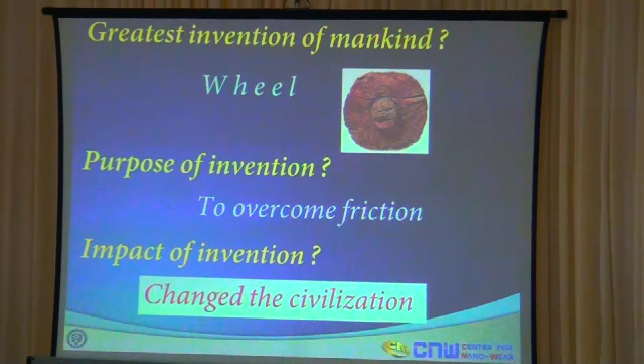Now, the ability to move one material from one place to the other changed many things, transportation, and had implications in various fields of technology. Also, if you look at this picture here that we often find in historical textbooks of tribology, you see this great statue being moved by a lot of people, a lot of slaves. But here is one friendly person who is allowing this task to be done very well.

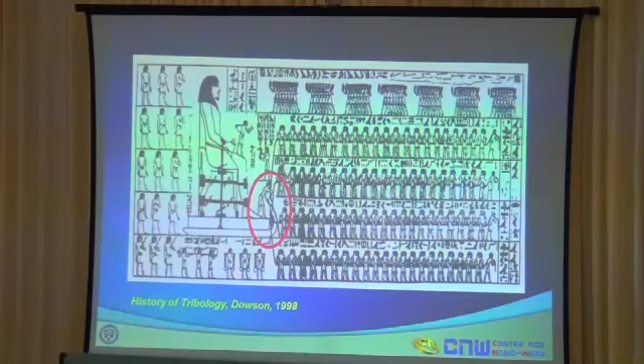And that is this first tribologist in the world. This person is basically lubricating the interface to make the sliding take place easier. This image was found in the walls of Egypt maybe 4,000 years ago.

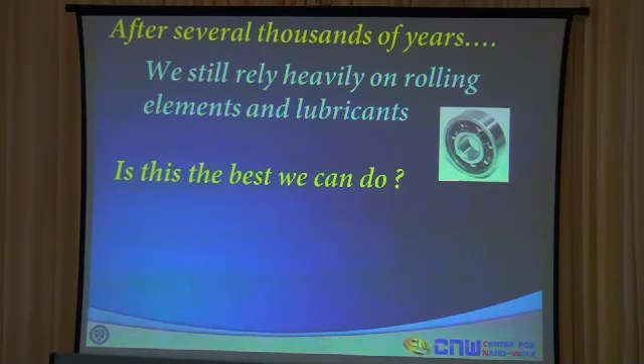After several thousand years, what do we have today? We still rely heavily on rolling elements and lubricants like bearings. Without these, machines will not survive. Also, is this the best we can do? Well, currently it seems like it's doing a good job, and it's the best we can do so far. We're getting more precise, we're getting smaller, but we have to be cleaner because we're talking about green tribology and we're concerned about environmental problems.

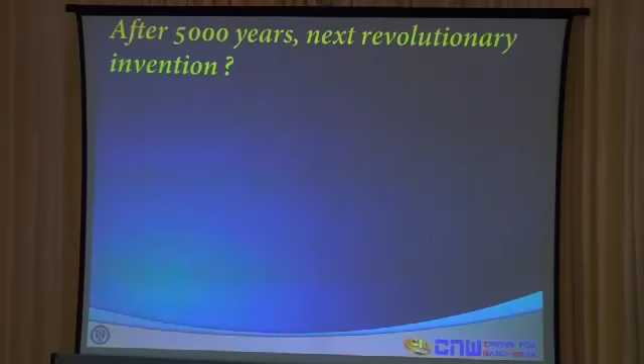Well, after 5,000 years, what do we think is the next revolutionary invention? This will depend on your individual thoughts, but maybe some of you will agree that perhaps molecular machines would be the next revolutionary thing. Being able to make things very, very small at scale so that we can probe into the bodies of our body without opening our skin with minimal invasive surgery, and also probing into microscopic things to do some sensing, diagnostics, and prognosis.

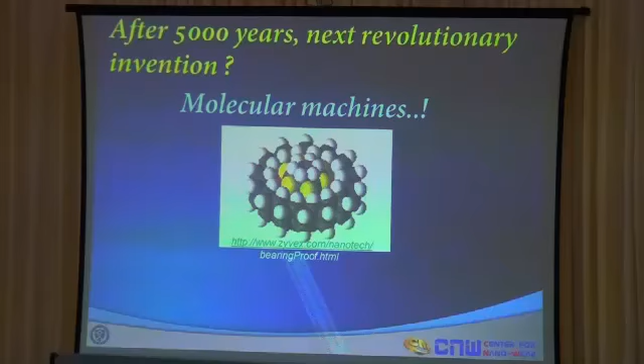This is an artist's view of what a molecular machine looks like, and actually chemists are trying to make this kind of machine right now around the world. Now, the crucial role of tribology is in making this kind of motors being able to run with sufficient reliability and low friction. Without tribology, this ultimate precision engineering will not be realized.

Fabricating the molecular machine is one thing. Perhaps many of you have seen MEMS motors developed at places like Sandia National Lab, with very cute micro MEMS components able to spin at very high RPM. But right now we do not have a single commercialized MEMS product that depends on gross sliding motion.

A lot of MEMS products are based on elastic movements, like accelerometers. Now what is the reason why, despite the fact that this kind of fancy MEMS component was developed many years ago, we do not have a commercial product? The reason is because we cannot overcome the surface forces, which become so dominating, especially at micro scales.

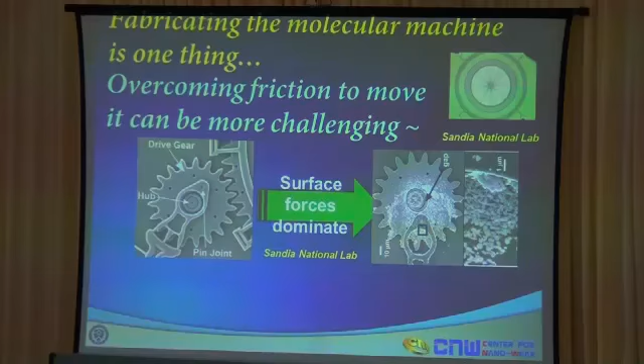This is an example of a micro gear composed of many mechanical elements at micro scale. We start running this component and because of surface forces, it fails and it's not reliable. These systems cannot work with conventional lubricants because the lubricants will dominate the forces due to surface tension. So these must operate dry or with very nanoscale lubricants.

Preventing wear would be a greater challenge in this kind of system. So with that brief introduction, what are the challenges that lie ahead? Despite the fact that tribology has been researched over decades, perhaps hundreds of years, can we control friction? The answer is no. Can we achieve zero wear? The answer is no.

What are the mechanisms? We're still trying very hard to understand why friction occurs, why wear occurs, to be able to prevent this in the ultimate end.

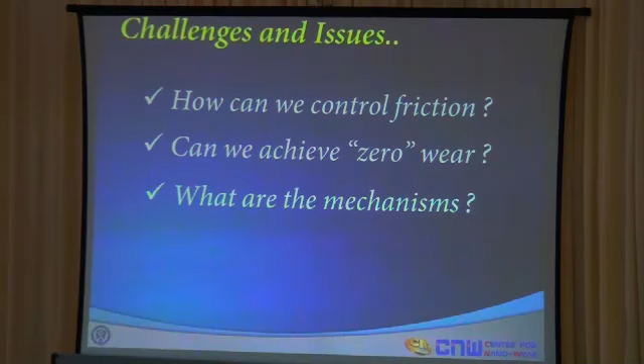What about macro versus micro phenomena? Tribology occurs over a very wide scale. Even earthquakes are related to tribology. Oil drilling, excavation - these are all macro scale tribology. Machining too. But now you can come into micro scale tribology, where you have micro components rubbing against each other. The conditions are completely different, and friction and wear is a very system-dependent phenomenon, as you all know.

So great challenges lie ahead. With that overall background, these are the contents of my talk. I know I'm giving about one hour for my talk, and I would like to talk about several topics that we've been doing over many years in our lab, so I will not bore you with one subject going deeply into it. First, I'll talk briefly about macroscale friction, especially the effect of particles on friction and wear, and what we can do to eliminate this kind of problem.

And then I'll move on to microscale tribological characteristics. Microtribology actually started because of a very important technology called hard disk drive. Hard disk drive was the ultimate driving force behind the development of microtribology as well as nanotribology. It's a very well established technology, and I would like to review some of the technology that went into the development of hard disk drive.

Then I'd like to talk about atomic force microscopy, which is the most important tool used in nanotribology, and the wear associated with such devices, and talk about silicon bushings, which are used in MEMS to reduce the contact area to reduce stiction, and discuss the wear of these components. Basically, the AFM probe tip and the silicon bushing represent high versus low contact pressure for silicon-based materials. I'll tell you that despite the fact the materials are similar, you have very different wear behavior because of the level of contact pressure.

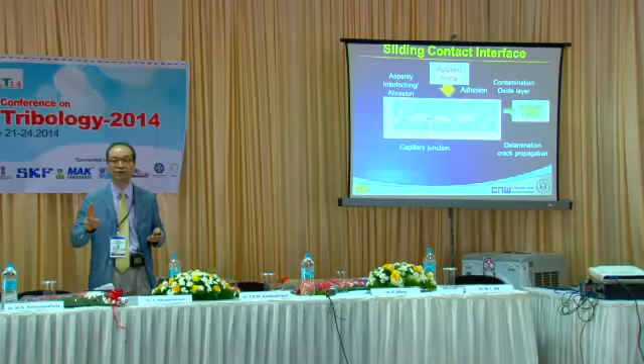So all these very complicated phenomena are going on at the interface, and we have to be able to control this. In describing this very complicated phenomena, we use two coefficients, as you all know. First one is the friction coefficient, and the second one is the wear coefficient. Perhaps this may not be so familiar to you.

Wear coefficient is defined by the wear volume times the hardness divided by load and sliding distance, represented by Archard's wear equation. In tribology, what we're trying to do is first be able to predict what the friction coefficient is, which is in the range about 0.001 for a very well lubricated system, and can be as high as 1 or above for dry systems. For wear coefficients, it can be about 10 to the minus 2 to 10 to the minus 8, depending on the system. Very wide range.

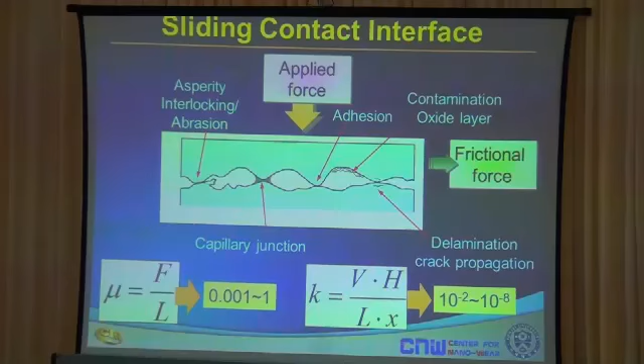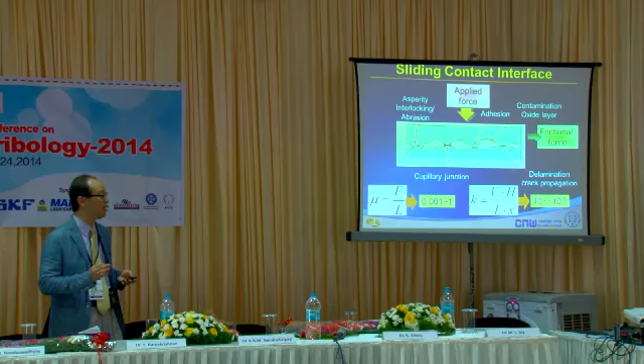So what is the purpose of tribology? Trying to be able to predict these coefficients and ultimately being able to control these coefficients. Are we able to do that? And the answer is no. We're trying very hard, but we're not able to control these values accurately enough for various technologies.

Now, given this kind of complicated situation, what do we know about macro-scale tribology? Firstly, as you all know, friction coefficient is not a material property. It is a system-dependent property, and it changes with history, and it changes with system.

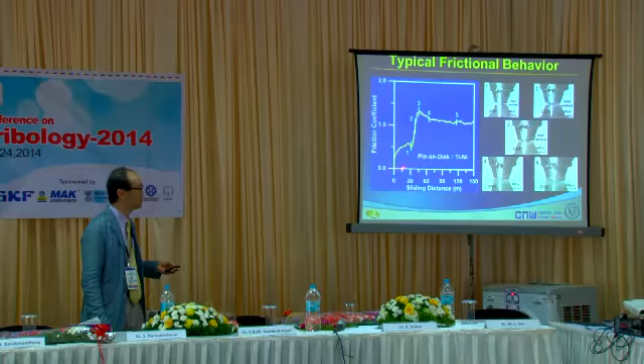This is data that gives you a very good example of such a characteristic of friction. What you're looking at is the friction coefficient versus sliding distance. If you have two metals sliding against each other, in this case titanium on nickel, you can see that the friction coefficient starts slow and then suddenly rises and reaches a steady state.

The point of interest is, why does this friction coefficient increase? Well, if we observe the sliding interface with a microscope, with a pin, and this is a flat surface here, the thing that you see here is a reflection, so you may ignore this cone-shaped thing at the bottom. It's just a reflection of the top surface. Bottom surface is flat. At the point at which the friction coefficient starts to increase, we see the creation of a significant wear particle.

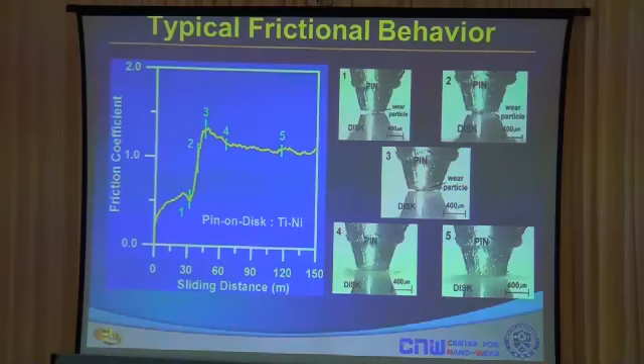This particle serves to damage the surface by way of abrasion and micro-cutting. Obviously, the friction goes up. And once enough number of particles are created at the interface, you sort of reach a steady state as particles are ejected from the interface and also created at the interface.

Now, how can we do this automatically? The way to do that is by texturing the surface so that the textures are able to trap the wear particles. And these are undulated surfaces that we've been researching over a long time now. This is an example of such a surface.

What you're looking at here is a silicon surface with grooves artificially fabricated on the surface to trap the wear debris that is being created. On the top surface, you see a regular flat surface after the wear test. In the case of the bottom surface where you have micro grooves, it is able to lower the friction by trapping the wear particles in these grooves.

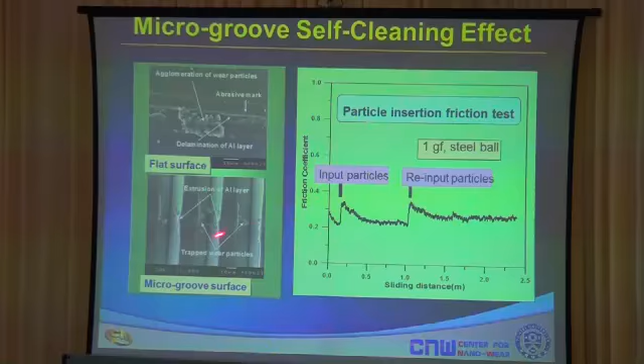This is the friction coefficient versus sliding distance. And at this point, we input the particles artificially, and the friction shoots up. But because of the grooves, it is able to self-clean the interface and lower the friction. Now we input the particles again, and the friction coefficient shoots up again. And then it is able to, again, eliminate the particles and reduce the friction automatically.

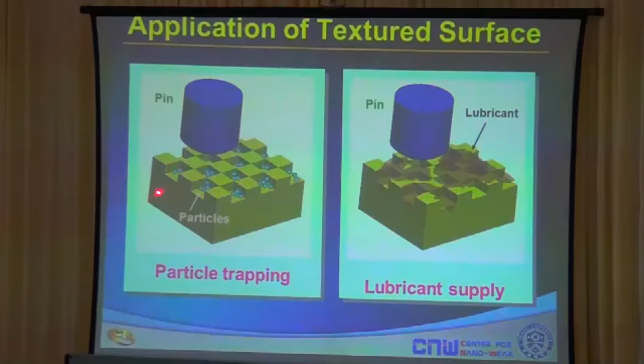So we have to use this kind of textured surface as much as we can in many mechanical systems to be able to reduce the effect of plowing action by the wear debris being created at the interface. So this is a conceptual idea about what texturing is. We would artificially fabricate these grooves on the surface that can act to trap the wear particles. And also in the case of lubricated systems, these traps are able to contain lubricant as reservoirs and being able to supply them to the interface more readily.

Now this kind of concept actually was proposed for cylinders and engines. And if you know about the lubrication state of engines, the piston ring travels between the top dead center and the bottom dead center.

In the middle section, the piston travels very quickly, and the interface between the piston ring and the cylinder liner is separated by a very thin lubricant film. In this case, the lubrication condition is hydrodynamic, and we don't expect much problem in terms of friction and wear. However, at the top dead center and bottom dead center, the ring stops momentarily, and you have pressure of the piston ring against the cylinder wall. This is when you go into mixed and boundary lubrication, and this is when you expect more problems.

So what we've suggested to avoid the problems at these extreme conditions is to texture the surface at the top and the bottom, to make the friction lower and increase fuel efficiency even by a fraction of a percent. I took this idea to car companies, and the first thing they said was, 'Professor, that's a very good idea, but it's not possible because it costs too much.'

This idea was proposed actually 20 years ago. Surprisingly, today a company called Doosan Industries in Korea is making engines like this for heavy-duty tractors. They're using laser techniques to groove the top dead center and bottom dead center to increase the efficiency of their tractors. It's not so feasible for passenger engines right now because it costs too much, but for specialized engines like ship engines, tractor engines, helicopter engines, this is a very feasible method to reduce some of the problems we face in these engines.

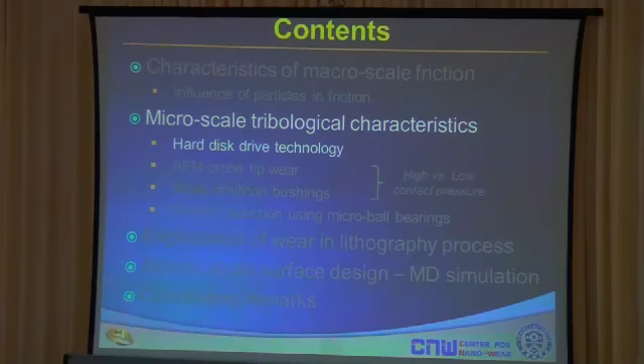As I told you earlier, the hard disk drive, which goes into every computer, has a tremendous amount of tribology inside the machine. Without microtribology developments, hard disk drives would fail immediately. What I'll be talking about is not the current hard disk drive, which is much more advanced, but the technology we've been using for this talk is quite old, yet so precise, and in terms of scale it's in the nanoscale. I'd like to introduce it to you.

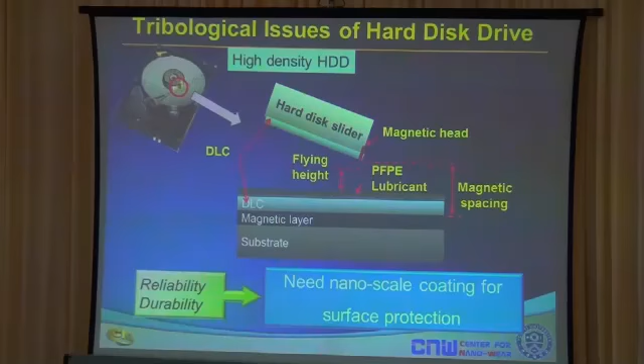If you look at the hard disk drive, it's composed of a slider head flying over a magnetic disk. The magnetic disk is composed of several layers, and the slider flies over the disk at a very low height, only about 10 nanometers. There's an incentive to lower this height so the head can be closer to the magnetic element, increasing recording density. So the industry is trying to lower this height further and further. Right now, in today's hard disk drive, the flying height is only 2 to 3 nanometers. It's mind-boggling to imagine the slider flying at that height.

Obviously, the problem faced is that sometimes you may have contact between the slider and the disk, causing friction and wear problems. This is what we want to avoid.

If we look at the way the disk is structured, it's also composed of complicated textures, including what we call a landing zone. The landing zone is a textured region with small protrusions on the surface, made by laser texturing. The purpose of these textures is to reduce the stiction between the slider and the disk when the slider lands on the disk as you turn off the computer. Without these grooves, the slider, because of its smoothness, would stick right on the disk and you wouldn't be able to start the disk. So laser texturing is used to make such grooves and patterns.

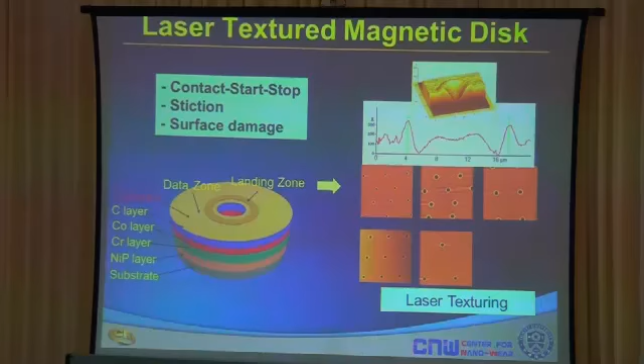When you turn off the computer, the slider will go to the landing zone, park there, and settle down on this track. Of course, the wear of these tracks is very important because it is sliding against the slider as the speed lowers.

And lubricant is used, PFPE—perfluoropolyether—a lubricant developed for this purpose. It's a fantastic lubricant with a thickness of only about 1.5 to 2 nanometers. So it's not like a liquid lubricant used in ordinary machines; it's a very semi-solid-like lubricant coated on the substrate by a dipping process, where you have a solution, dip the disc, and it's automatically coated on the surface.

But it's a little bit more complicated than that, because some of the molecules are attached to the substrate by way of chemisorption, in other words, by chemical reaction, so the bonding is very good. However, for most of the part of the lubricant, it is attached to the surface by physical adsorption, by van der Waals forces, and these are very loose molecules that have mobility and can move around.

It turns out that the percentage of these mobile molecules is important, because if the lubricant is removed from the track due to some contact, it needs to be replenished. In other words, the lubricant should be able to flow back and fill in that location. So the percentage of this physically bonded lubricant is important, but if you have too much of it, it will again pose some problem.

Now, how do you control the percentage of this physically bonded lubricant? You do that by the process of annealing. By controlling the temperature and the time of annealing, you can change and adjust the percentage of the bonded part to the unbonded part.

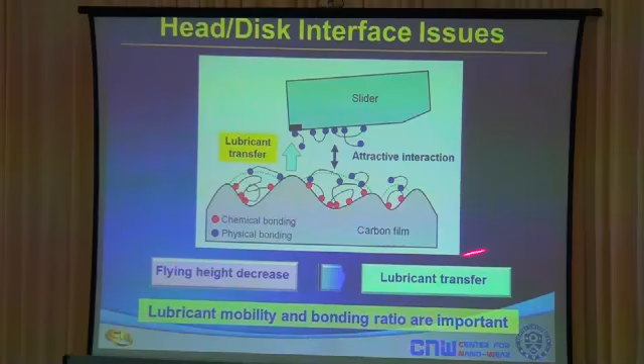So let me give you a schematic of what's going on. Here's a slider, and the head is at the tip of the slider, and you have lubricant on the surface. During interaction you have some lubricant transfer, and this can contaminate the head and make problems in terms of signal transfer between the head and the disc. As the flying height decreases, the lubricant transfer occurs to a greater level, and as I told you before, lubricant mobility and bonding ratio is important.

So what we do in this experiment is we want to see the effect of annealing, to see how annealing affects the flyability of the slider above the disc.

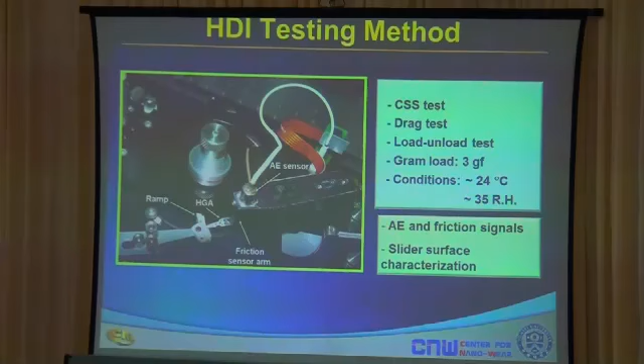This is a simple test equipment, a commercialized equipment that has a slider and a disc. This is the slider you see here, and you cannot see the head, but the head is a very small thing at the end of the slider. We conduct this experiment in what we call a contact start-stop test.

We start it, stop it, start it, stop it. We repeat this for 20,000 times. We can also do this test under a drag test, in which we make contact between the two specimens and run a sliding test at low RPM so the slider will not fly above the disc.

These are the conditions at which we perform the experiments. We have an acoustic emission sensor to monitor any abnormal signal between the head and the slider, the slider and the disc. And also we have friction sensors to monitor the frictional force.

It's semi-solid, but it works tremendously well in hard disk drives, and this is what makes today's hard disk drives work. Now, this is the effect of PFPE on flyability without annealing. This is the acoustic emission signal, and this is the friction signal. You can see that there's quite a bit of noise in the signal.

After you do this test, we disassemble these parts and look at the slider face, and you can see that the slider face is contaminated with lubricant. These are all patterns on the slider that allow it to fly at a certain height. But you see streaks of lines which are contaminations from the lubricant on the disc.

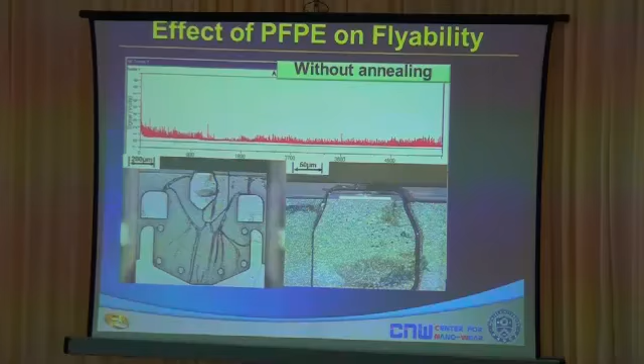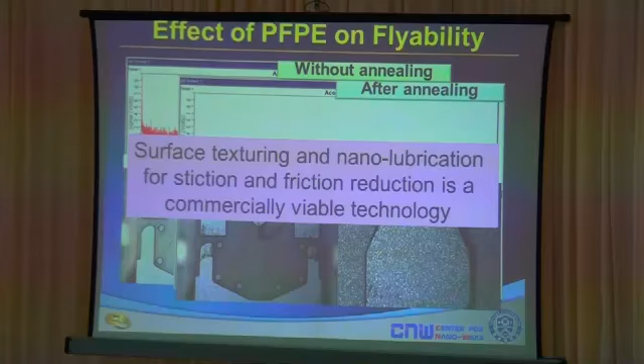Therefore, in the case of a very well commercialized product like hard disk drives, surface texturing and nano lubrication for stiction and friction reduction is a very commercially viable technology. Now, what we hope is to extend this kind of technology to other microsystems, such as MEMS that I showed you earlier. But without the drive from the industry, this kind of technology will never be utilized at the industrial level and will only be limited to lab scale.

Now I'd like to move on to another very important topic of nano and microtribology, and that's the issue of atomic force probe wear.

Atomic force microscopy is based on a very sharp tip that scans over a surface, and the deflection of this cantilever is measured using a very sensitive laser interferometry. By noting the amount of deflection, we can map the surface. If you scan this in X direction and Y direction, you're able to map the surface topography in 3 dimensions. And we can buy this equipment commercially, as you all know.

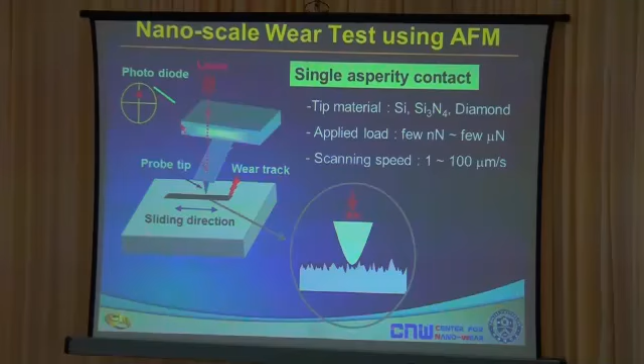But the issue is, because it uses a very sharp tip, there is an issue of wear of the tip as it slides over the surface of your sample. The tip material that we commercially use is silicon nitride. Sometimes we use diamond, which is much harder. The applied load is in the range of a few nanonewtons to a few micronewtons. The sliding speed is on the order of tens of micrometers per second.

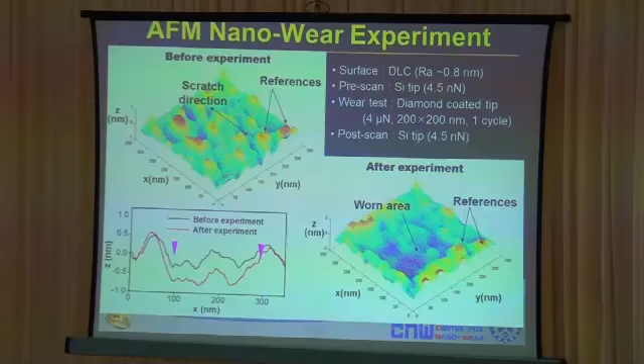Many times, users don't realize they just use the same tip to measure the surface because of convenience. These tips are expensive, so you don't want to replace them every time. But you have to be aware of the fact that tips do wear out and it will affect your measurement significantly.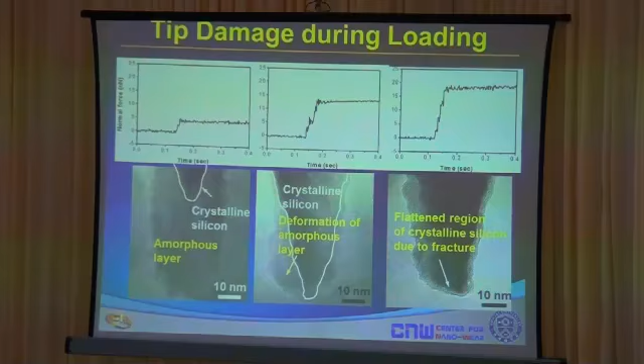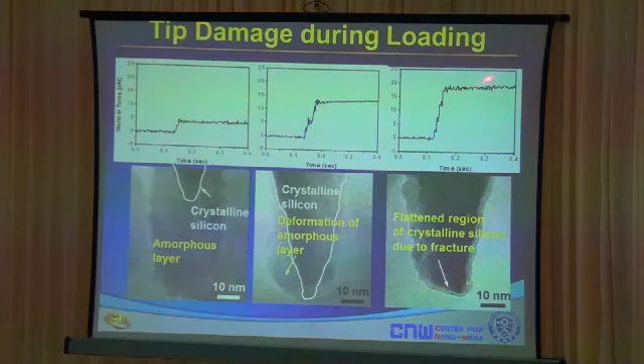Another thing we should be aware of is tip damage during approach. If you have an AFM tip approaching your specimen, but you do it at the wrong rate, you will damage your tip in that approach process. What you're looking at here is normal force in nanonewtons, up to 5 nanonewtons, plotted against time of loading. In this very short time of low force loading, your tip shape remains intact - in other words, you do not damage it. However, if you increase the rate at which you approach the surface for a very high load of 15 nanonewtons, you can see that you've severely damaged your tip just by approaching the surface. So this is another thing we have to be aware of when using the AFM.

Now, we looked at the wear of the silicon tip and what the mechanism of silicon tip wear was, and our point was to try to be able to quantify the amount of tip wear in this AFM operation.

What we did here was perform 320 micrometers of sliding on a silicon surface, and what we find is that the region where there was contact was flattened due to wear. By noting the shape of the tip before and after the wear test, we're able to quantify the wear amount, and furthermore, suggest the mechanism of wear.

This is the mechanism we suggest: the silicon tip becomes oxidized, and this oxidized layer, because of abrasive adhesive action against the specimen surface, will eventually wear out.

This is another test we did, where we looked at the progression of tip wear with respect to load. The load we used was between 10 nanonewtons up to 50 nanonewtons. Here we're looking at the wear volume and the wear coefficient against the sliding distance.

What you can see here is that the wear coefficient initially is very high, but it decreases as the wear increases. The reason is because the contact pressure decreases as the tip gets blunted.

The important outcome of this research was quantifying the amount of wear. The wear coefficient I introduced earlier for the AFM tip is in the range of 10 to the minus 2 to 10 to the minus 3, which is in the category of severe wear. So even despite the loads we use being in the nanonewton range, for AFM used in nanotribology research, the wear coefficient we get is about 10 to the minus 3.

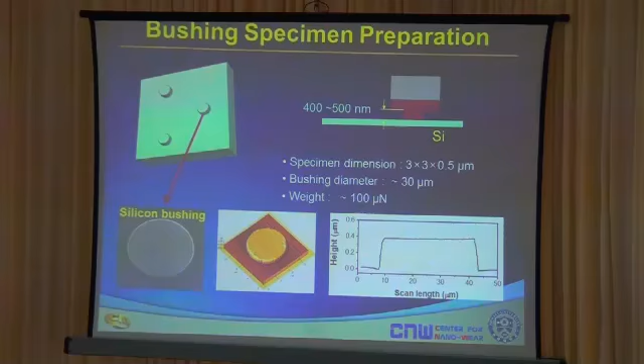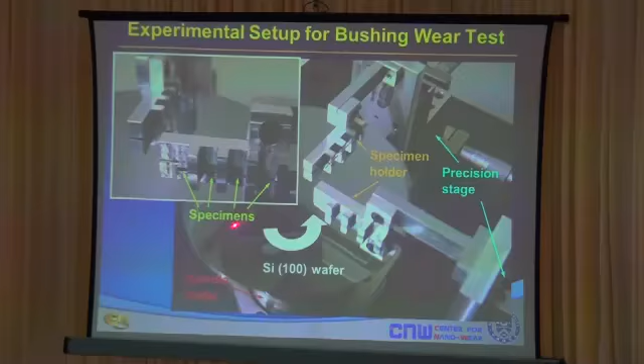We create these 3 bushings on the silicon specimen and reverse the specimen on top of a counter surface, which is also silicon. So this is the counter surface - it's silicon, and the specimens are placed in these pockets here. There are 3, and these specimens are allowed to slide against this silicon wafer as the wafer rotates slowly.

We try to rotate it at a certain speed so that the top specimen will not bounce around, because if you use 2 flat surfaces in a wear test, the biggest problem is alignment. So to overcome this, we don't apply external forces on the specimen - it's the natural weight applied to the counter surface. We run the bottom specimen very slowly so that we can maintain relative flat-on-flat contact.

The good thing about this kind of experiment is it's very simple, and we can run experiments for a very long time. Unlike the few millimeters you use for sliding in AFMs, we run these experiments for kilometers.

By measuring the amount of wear volume, we're able to quantify the wear coefficient, and the wear coefficient is in the range of 10 to the minus 7, which is about 4 or 5 orders of magnitude smaller than that of the AFM tip. Now, if you look at the wear of the silicon oxide bushing, we fabricated silicon oxide bushings and observed the wear.

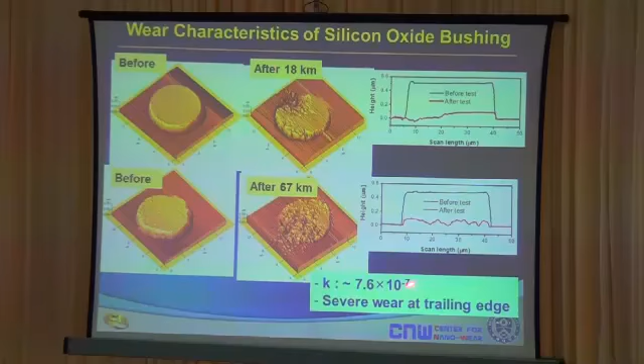After 67 kilometers, the initially very well-plateaued bushing became worn like that. From here, we can quantify wear, and the wear coefficient was about 7 times higher, also in the 10 to the minus 7 range, but the coefficient is about 7.6. So silicon oxide, which is softer than silicon, showed much greater wear.

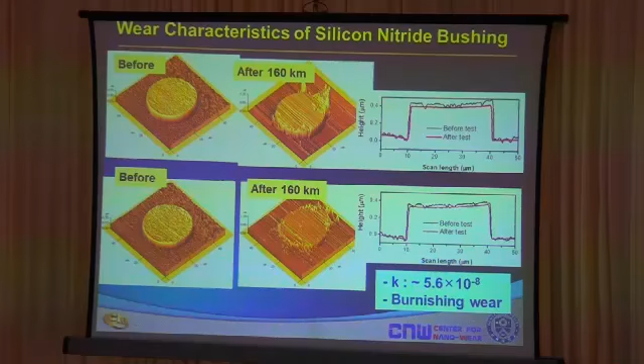What if we move on to a much harder silicon nitride bushing? You can see that it wore out very little, and the wear coefficient in this case was in the range of 10 to the minus 8, much lower than that of the silicon bushing itself.

So what is all this showing us? It's showing us that even for the same kind of material, silicon, depending on the contact pressures, you can have tremendous difference in the wear coefficient.

In the case of the silicon AFM tip, with a radius of 20 nanometers, despite the normal load being only tens of nanonewtons, the contact pressure is in the gigapascal range, or hundreds of megapascal. In the case of bushings, despite the load being as high as 33 micronewtons, the pressure was only in the few hundred kilopascal range, and the wear coefficient is much, much smaller.

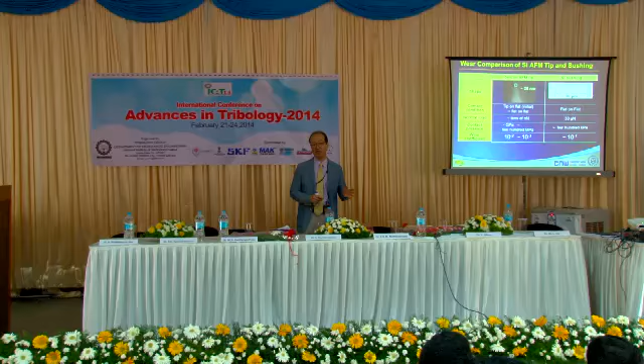So basically, this study is showing you that tribology is very system dependent. It's not a material property. Depending on the contact condition and also on the contact pressure, you can have tremendous difference in the tribological characteristics. There's 4 to 5 orders of magnitude difference, and AFM wear certainly is not at the nano level—it's tremendous if you quantify it.

Now, to go into somewhere between the atomic force microscopy and bushing experiments, what we did was create one of the smallest pin-on-disc type of experiments. Here what you're looking at is a gold wire wear test.

Diameter of the gold wire was about 60 micrometers. I don't know if you can see this, but that's the gold wire. It is contacted against a silicon wafer at an angle, and this gold wire was very carefully prepared so that it's relatively straight and the edge is flat. So the wire is in the form of a cylinder, and basically we're contacting the edge against the silicon wafer, and we rotate the silicon wafer to create wear on the tip of the gold wire.

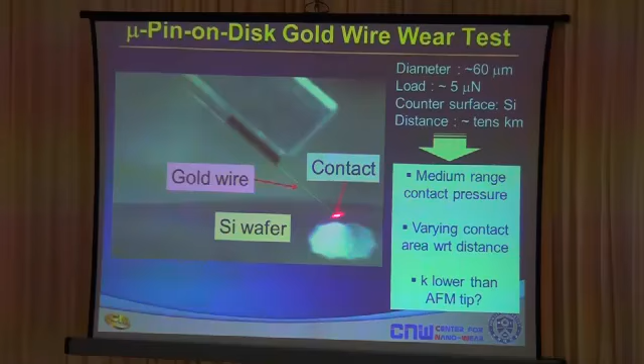This is the amount of wear you get after 29, 58, and 80 kilometers of sliding. The amount of wear we can quantify by noting the volume that's been taken out from this tip of the gold wire.

When we quantify this, what we find is that the wear coefficient varies with sliding distance. It does not increase continuously—it increases and then starts to go down. Now, from this, what we do is measure the incremental wear coefficient, the wear coefficient between sliding distances.

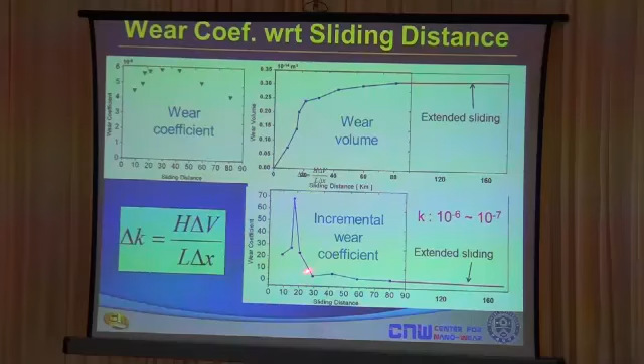The incremental wear coefficient is defined by this particular equation. So between sliding distances, if we measure the incremental wear coefficient, it goes up and then goes down to a very low level. With extended sliding, basically what we're saying is that we can eliminate wear to a great extent. As the material runs in against each other and optimizes the sliding interface, you can see that the wear decreases tremendously.

We can use this concept to design the surface to start with. In other words, with optimized sliding and optimized surface finishing, we can control the local contact pressures to achieve extremely low wear. And if we can do this with machines we're using for automobile component parts and all that, I think we can reduce the initial phase at which we initially have high wear.

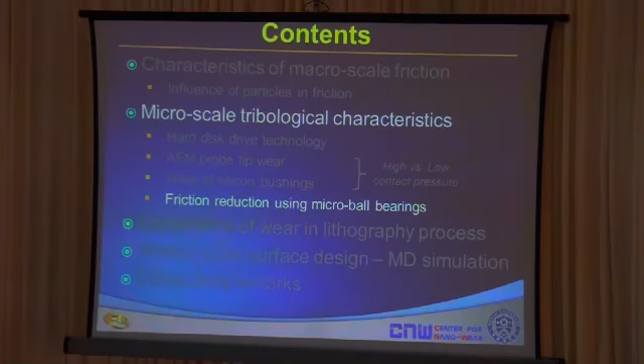Now I'd like to look into the way of reducing friction using micro ball bearings. As we all know, we use bearings extensively in all machines. So in the case of micro components, why not try to use micro ball bearings as well?

So what we did was try to apply sub-100 micrometer size micro ball bearings. We place it between two flat surfaces, and we drive the top surface and observe the rolling friction with this micro ball bearing between the two flat surfaces.

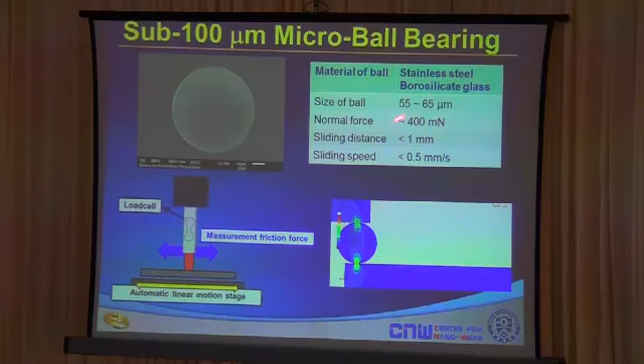This would be the schematic of the equipment. This is the top surface, this is the bottom surface, and these are micro ball bearings placed between the two flat surfaces. We drive the bottom stage to measure the friction force, and we monitor that by the load sensor attached over here. The size of the ball we use is in diameters on the order of about 50 micrometers, and that's the normal load that we use for the experiment.

With ball bearings at the interface, they're effective in reducing the coefficient down to about 0.007 range. In other words, these micro ball bearings do work.

So the number of balls is not a critical factor as long as you have 3 or more, because you would need 3 contacting points to support 2 plates.

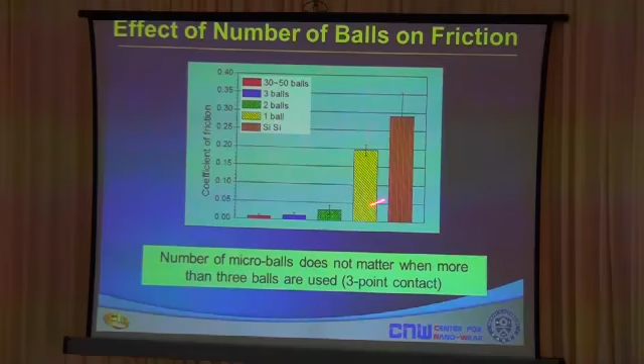We find that by using a few microballs, you're able to lower the friction. But the problem is if you have few balls, the amount of force being applied to these balls would be high, and therefore you would have a high failure rate.

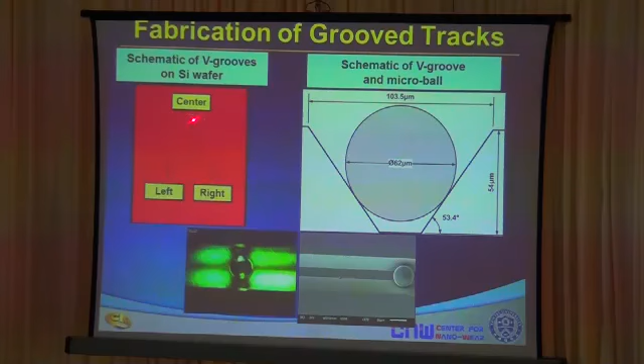So what we did in the next experiment was to create grooves that look like this. We created 3 grooves, 3 tracks on our silicon surface, and the groove dimension was about 50 micrometers, and about 100 micrometers. We place our ball inside the grooves, as you see in this SEM image and also in this optical image. So we have 3 balls inside these grooves, and we put the top surface like this, and we perform our sliding.

The problem with these micro ball bearings is, unlike macro scale ball bearings, we're unable to heat treat them. So they're in a very soft form, and because of the softness, they undergo severe plastic deformation, and because of that the friction coefficient is relatively high.

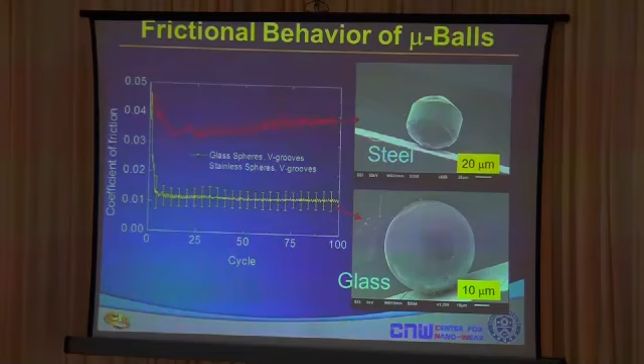In the case of the glass ball, the hardness is higher than the steel ball that we used, and in this case we're able to maintain a low friction coefficient for about 100 cycles.

Of course, we're interested in a much higher number of cycles, and this is a test that we did for about 2,000 cycles without lubricant and with lubricant.

The lubricant I call here is a nano-lubricant because it's not a liquid type of lubricant. It's the kind of lubricant that we use for hard disk drives. It's a single monolayer of organic film, so it's like a semi-solid type of lubricant. Its purpose is to reduce the stiction between the two surfaces.

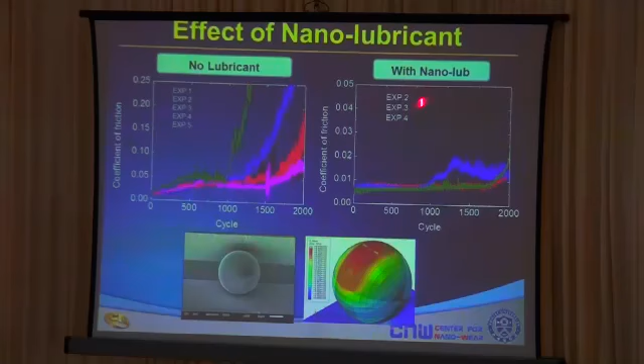Without the lubricant, you can see that the balls fail at about 1,000 cycles. But with the nano-lubricant, you can see that for 3 repeated experiments, we can maintain the friction coefficient relatively low up to a much larger number of cycles.

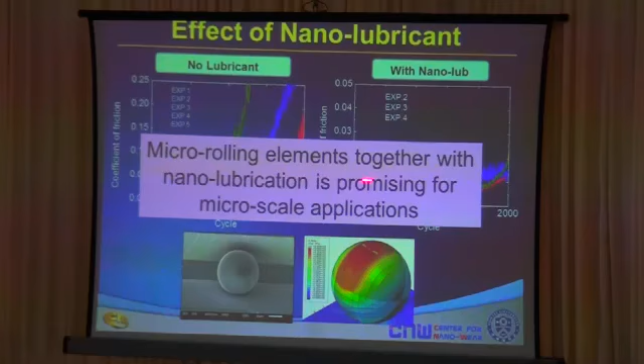Obviously we need further optimization to make this particular technology commercially viable, but nevertheless we've shown the feasibility of using microballs for very small mechanical systems. So, micro-rolling elements together with nano-lubrication is promising for micro-scale applications, would be my message to you.

Now I'll go into the next topic of exploiting wear for the lithography process. The reason why I got into lithography from tribology is because, after all, if you look at wear, it's the process of removing materials, and that's exactly what we want to do in manufacturing when we do cutting, grinding, or polishing. But wear occurs at such a small scale that if we can control it, we can control the manufacturing process and turn it into a very precise, ultra-precision manufacturing process.

So the concept was to apply this kind of wear process for lithography, and many people have done that; it's sometimes called direct scanning probe lithography. Basically, you take a very sharp AFM tip and scribe against the surface to create very fine patterns.

The problem with this process is, because of the wear I showed you earlier, when you create these small patterns on the surface, you experience a very large amount of tool wear because of high pressure, and also you have creation of burrs at the surface, just like you would in typical mechanical machining or grinding. Also, the depth of cut you can achieve is very shallow because of the limited force you can apply to the tip, otherwise the tip will break.

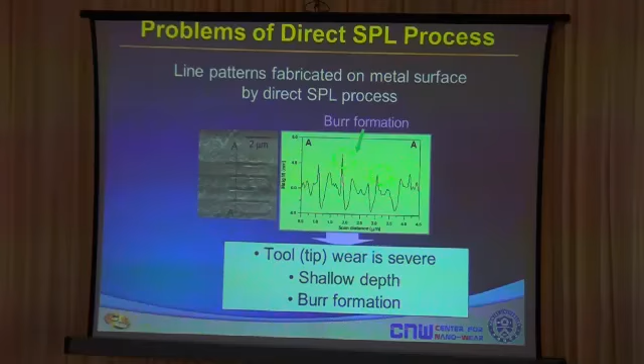So what we try to do is improve upon this direct lithography technique and be able to make these grooves without facing these problems. This was the idea: it's called Mechanochemical Scanning Probe Lithography, MCSPL.

The concept is as follows. We use the same AFM, but we don't use it to machine the substrate directly because the tool will wear out. On the substrate, we coat a very soft material, in this case a self-assembled monolayer, an organic film. We use an AFM tip programmed to remove the self-assembled monolayer at locations where we want the pattern to occur.

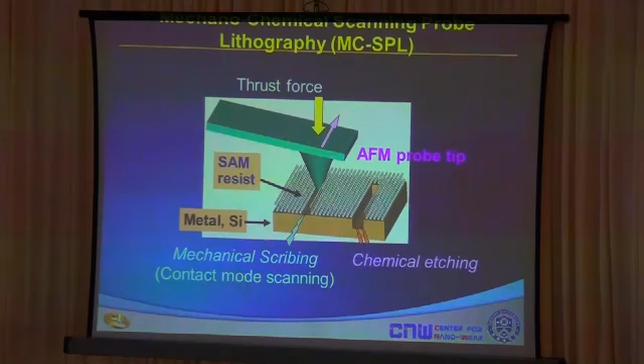So after mechanically removing the soft self-assembled monolayer with an AFM tip, we follow it with a second process of chemical etching. The self-assembled monolayer serves as the protecting resist in the etching process, so the exposed region will be etched and the covered region will not be etched. After the chemical etching, we're able to create these very fine grooves.

The self-assembled monolayer is a very interesting material, heavily investigated by chemists. It's a functionalized molecule with a long chain of carbon, and at one end it forms a chemical bonding with the substrate, and the substrate bonding against the lubricant layer is very stable. At the end you can have a terminal group, and you can functionalize this molecule to make it hydrophobic or hydrophilic, however you want. You can also adjust the length of this chain using different kinds of chemicals.

When you coat this kind of chemical on your silicon wafer, simply by dip coating, you're able to align these molecules very well on the silicon surface. It's called a self-assembled monolayer because it automatically aligns to a very stable, minimum energy state, represented by the schematic here.

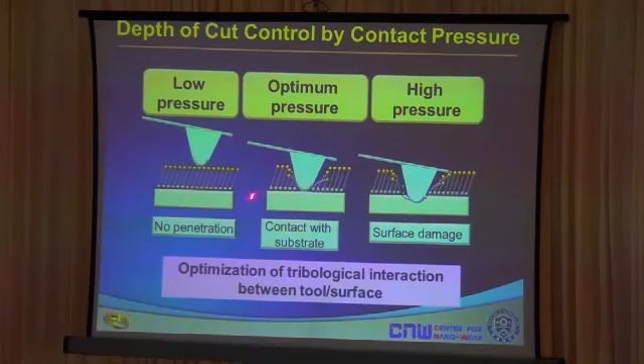Using this particular resist, what we want to do is remove just the 2 nanometers of resist from the silicon surface. If we have too low contact pressure, you will not be able to penetrate the organic film. If you have too high contact pressure, you go beyond the organic film and start destroying the substrate, which is not what you want to do. Basically, you want to optimize the contact pressure so that you're able to just remove the self-assembled monolayer, as shown in this figure.

Obviously this needs a lot of optimization, modeling, and trial and error. In the end, we're able to remove just this self-assembled monolayer top layer, and these are the patterns we're able to achieve with this technology: a silicon surface with 1 micrometer spacing, width about 250 nanometers, depth about 100 nanometers.

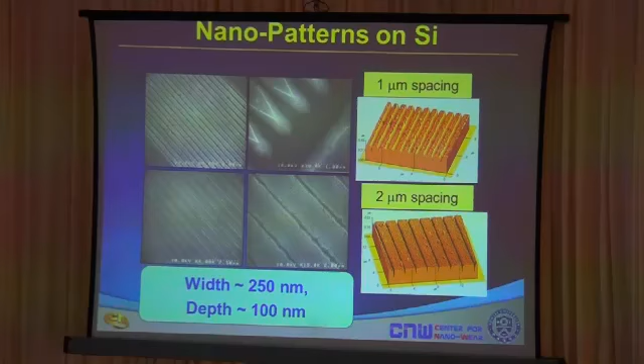Obviously you can make this kind of pattern using photolithography, but photolithography requires several steps and you have to make a mask, and once you make a mask you cannot change the pattern. But if you use this process, you can simply program your AFM tip to whatever pattern you like, so you're very flexible in terms of the kinds of patterns you can make.

So we propose this method as a flexible way of making small numbers of parts with surface patterns. Not only can you do that at 250 nanometers, but if you control the process very well, we're able to reach down to about 70 nanometer grooves on silicon surfaces.

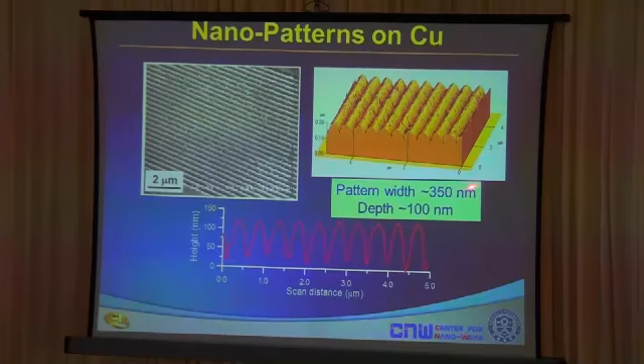Not only on silicon surface, we're able to do that on metal films as well. We're able to make these fine patterns on copper with a pattern width about 350 nanometers, a depth of about 100 nanometers. We're also able to do this in a relatively large area, over 90 by 90 micrometer scanning, on both silicon and copper.

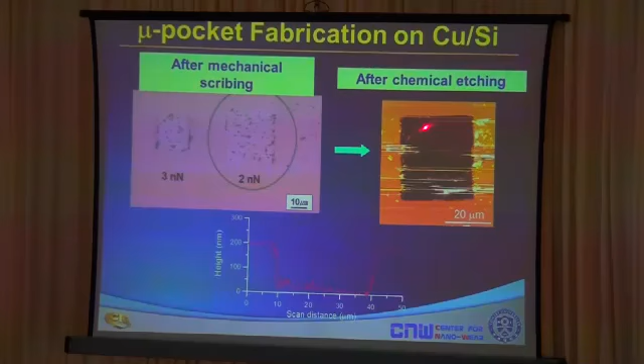We can also make pockets on a copper surface coated on silicon. This is the kind of pattern you get after mechanical scribing with 3 nanonewtons force, and this with 2 nanonewtons force. After mechanical scribing, you do not see the pattern, but if you etch the surface, you expose it to create this kind of pocket, about 200 nanometers in depth.

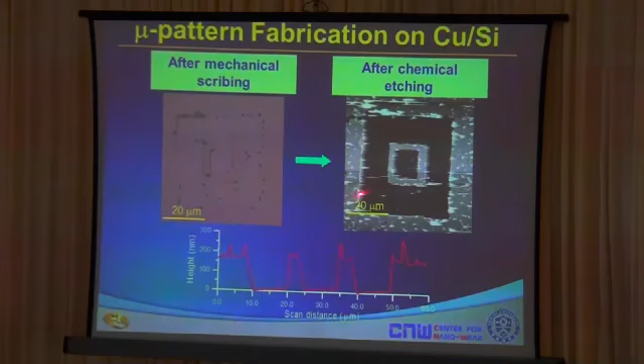You can also create this kind of micropattern with trenches simply by programming your AFM tip to remove the resist material wherever you want, creating gratings on copper surfaces. You can also use a tapping mode to create letters in English, Chinese, or Korean simply by programming the motion of the AFM tip. It's a very flexible way of patterning your surface.

Furthermore, what we're able to do is make patterns on non-flat surfaces. When you're using photolithography technique with optics, one of the fundamental requirements is to have a very flat and smooth surface. If you don't have a flat surface, you will have problems in terms of patterning, leading to failures.

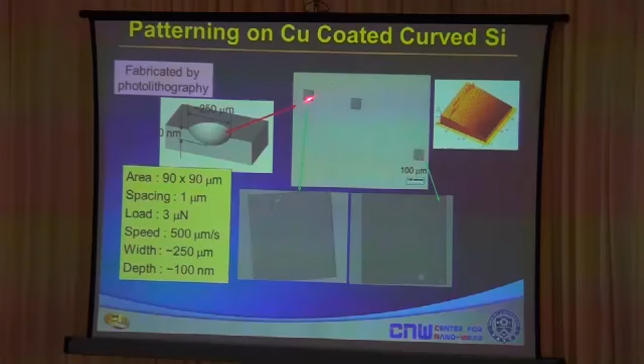However, because we're using an AFM tip with feedback control which is able to follow the contour of the surface, we can make these patterns even on inclined surfaces, as you see here. This is a round pocket with about 250 micrometers and a depth of about 50 nanometers. We fabricated lines at the edge of the pocket and inside the pocket, and you can see that even with inclination, we're able to make very fine patterns on our copper-coated surface.

The problem here is that we would like to make the pattern as small as possible, but as you can see, the pattern width is about 70 nanometers, and the smallest we've been able to make was about 30 nanometers. But the tip size we use to make these patterns is about 10 nanometers. So why are we getting such a big width despite using a very sharp tip?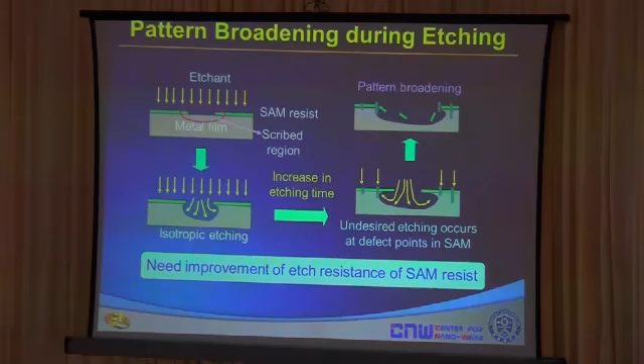This is because we're not able to optimize the etching process, and we face the problem of pattern broadening during etching. This is the SAM resist, and this is the part removed by mechanical action. When we etch the surface, the etchant penetrates below the resist area and can lead to failures in the resist area, ultimately creating a width larger than the initially scribed mechanical region. So we need further optimization to make sure the width would be equivalent to the tip size we use.

In order to see the effect of the tip size, we perform molecular dynamic simulation where we scribe the surface using a very sharp tip and look at the width of this pattern. This will be sort of the theoretical limit of this particular process. What we find is that the width is wider than the tip because of the van der Waals force between the molecules.

As these molecules are moved mechanically, the tip pulls the surrounding molecules by van der Waals force. So the width of the pattern has to be inevitably slightly larger than the tip width itself.

What we further did was to see the effect of tip geometry on the kind of width pattern we got. This is a sharp tip, and these tips represent a more realistic tip geometry. This is the TEM image of a silicon tip, so this was modeled to better represent a real tip than this particular idealized one.

In the end, what we see is that during simulation, we're able to achieve width on the order of about 2 to 3 nanometers. Practically, we're not able to achieve this, but theoretically speaking, this process should be able to create patterns at the few nanometer level.

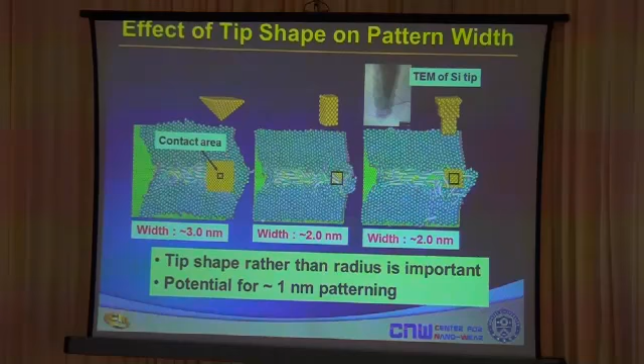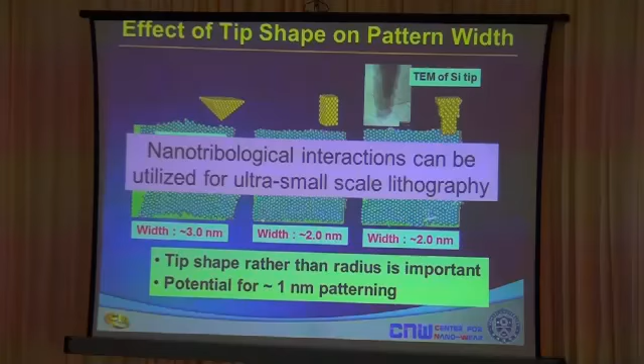So even for this kind of lithography technique, nanotribological interactions can be utilized, and it's very important because to optimize this process, we have to control the frictional interaction between the tip and the surface, and also come up with the right amount of force to penetrate the film.

Now I'd like to go into the final topic of my presentation, which is atomic scale surface design using simulation. Ultimately, what we want to do is design surfaces. Mechanical engineers design bulk shapes, but I tell my students that the age of designing only bulk for different parts is moving on.

We have tremendous amount of computing power. We can use computer-aided engineering. We have tremendous software, all sorts of FEM simulation we can do to create bulk shapes. But do we ever design surfaces? Despite the importance of surface, we do not use this concept in our design.

So ultimately, in the end, what we'd like to do is be able to design the surface at the atomic scale. And because this is not practical by experiment, we perform this using simulation.

What is the purpose of surface nanostructure? We use coatings heavily in components, but coatings are limited because it is a dense structure, and you're limited by the mechanical properties you can derive from a continuous film. What we hope to do is structure the surface, and by structuring the surface, derive elastic properties and toughness properties that we cannot get with a continuous coated surface.

And we can structure the surface because there is a tremendous spectrum of surface fabrication techniques that my colleagues and your colleagues are working on.

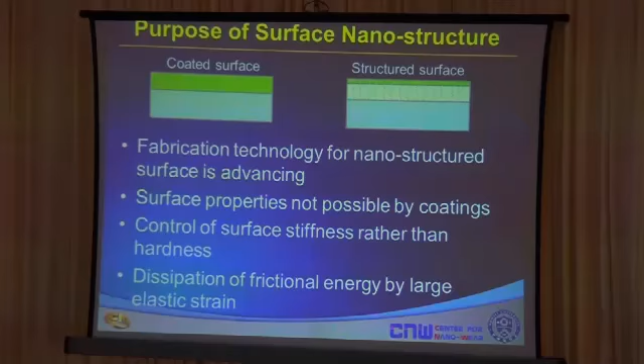Ultimately what we hope to do is, by achieving large elastic strain, dissipate the frictional energy that would otherwise be used to permanently deform the surface to create wear. So how do we make the surface so that it can absorb energy through large elastic strain, thereby dissipating the energy properly and not utilizing that energy to destroy the surface?

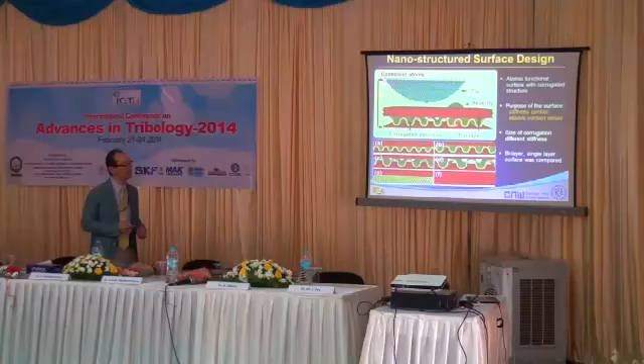We propose this kind of surface. Basically, it's a corrugated surface. If I were to relate this type of surface to a realistic situation, this would represent what we call folded graphene, a layer of carbon that's been folded, that chemists work with.

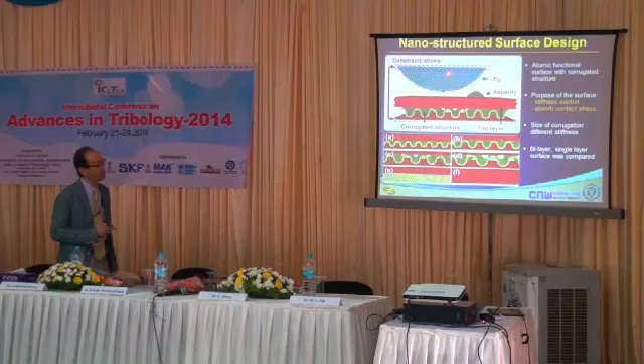What you're looking at here is a corrugated surface with different geometry. On top of that you have another coating layer, and I put an asperity there, and there's a tip. What we're going to look at is what will happen when the tip approaches the surface, contacts against this, and slides against the asperity, how much wear will occur on the tip. This is what we want to see.

Now, why is this asperity there? The asperity is there because in real situations you will never have a perfect surface without an asperity. Asperity is always there, and we have to overcome interaction against the asperities to control friction and wear.

So we tried that with different sizes of corrugation, and also with a single layer and a bilayer. We use bilayer and single layer surfaces as well and compare that with these structured surfaces. What you're looking at here now is contacting of the tip against the bilayer surface versus the corrugated surface.

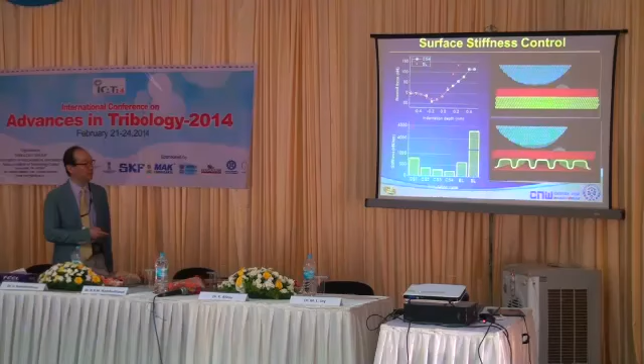What we're looking at is that the stiffness of the bilayer is much stiffer, as expected, than the corrugated surface. We measure the stiffness by performing simulations for all our designs, and we're able to quantify the stiffness for different designs.

And when we slide over the asperity, what you're looking at here is the asperity that I showed before. It's the tip in contact with the surface, and now it's sliding in the tangential direction.

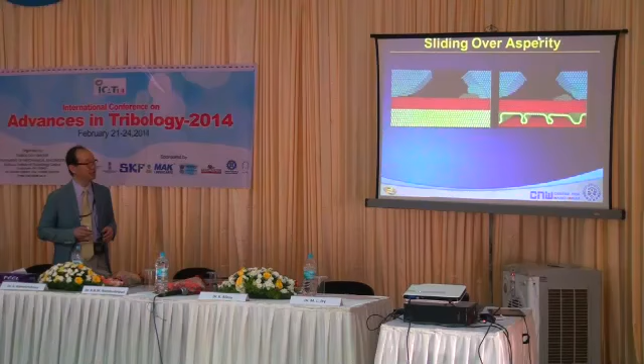You can see that in the case of the corrugated surface, it is able to accommodate the deformation caused by the presence of this asperity largely by elastic strain, thereby absorbing the energy. So the surface structure allows large elastic strain, and the elastic deformation absorbs the stress which would otherwise be used to destroy the surface.

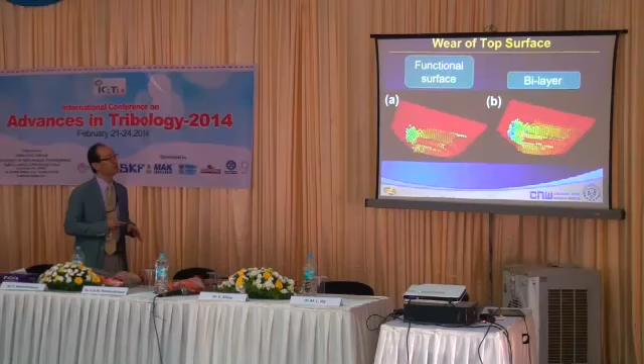We compare the top surface in terms of wear, and we count the number of atoms that have been removed from their initial position, which we quantify as wear. Compared to the bilayer, where you see a lot of displaced atoms at the top surface, the corrugated surface shows a relatively smaller number of displaced atoms. We're using this result as an indication that the structured surface performs better in terms of reducing wear.

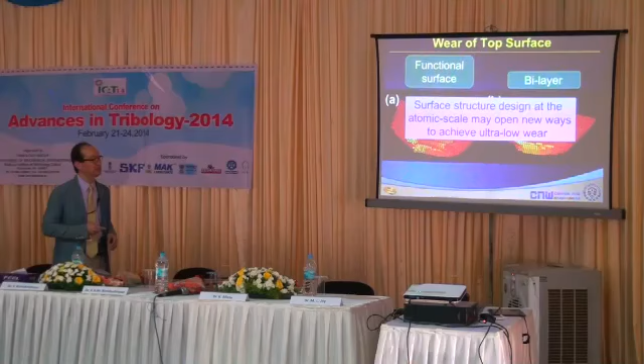So, surface structure designs at the atomic scale may open new ways to achieve ultra-low wear. That is the final message that I have for you.

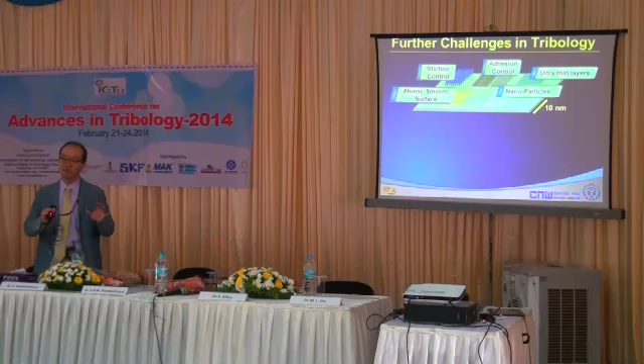With this, I would like to conclude my talk with further challenges in tribology. Basically, what we want to do in tribology is to be able to functionalize surfaces for the purpose of reducing friction, stiction, and wear. There's tremendous things we can do to the surface in terms of texturing, adhesion control, ultra-thin coatings, and so many other things. There's so much technology involved in terms of texturing, coating, and structuring.

What we have to realize is that there's tremendous value that we can add to the surface. I think tribologists should try now to add value to the surface, not just to the bulk material. If we add value to the surface, we can certainly achieve things that we cannot achieve today, and hopefully tomorrow we'll be able to realize the molecular level machine that I showed you earlier. With that, I would like to conclude my talk. Thank you for your attention.